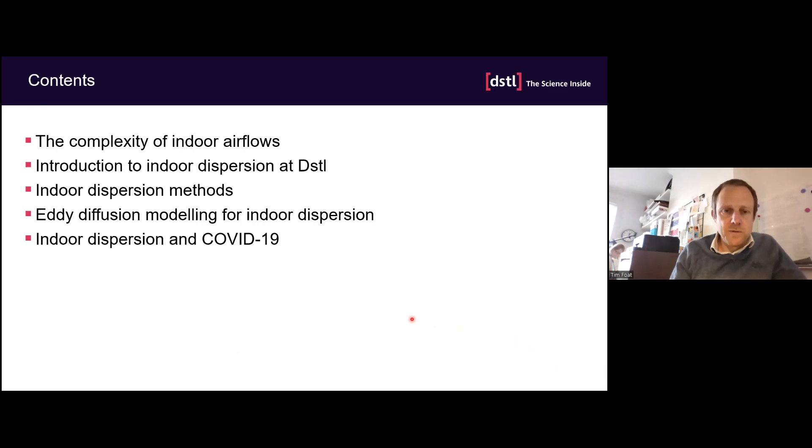So I was going to start by explaining why indoor airflow is complex. Indoor airflow is complex for a number of different reasons. And some of these are the flow in indoor space is often relatively weakly driven. So compared to outdoor flow, when you can have a strong dominant wind direction, often there's very weak drivers to the flow. And this could be the same in a mechanically ventilated space or a naturally ventilated space.

And then second, you can have multiple flow directions. So in a naturally ventilated space, you can have two windows open, a window and a door, and you have flow coming from different directions. And even in a mechanically ventilated space, you're likely to be supplying air from a number of different directions. And because of this weakly driven flow effect, the secondary drivers of the flow can be important, so the thermal effects can be significant. And all these factors together result in airflow that's nearly always unsteady and is typically turbulent.

So I've used this little example here to try and show some of the complexity in the airflow. This is a simple test case that was popularized by Nielsen in the 1990s, and we used it more recently to look at large eddy simulation. This room in our case was 9 meters long, 3 meters wide and 3 meters high. Air is supplied at the top left and is extracted at the bottom right. We had 10 air changes an hour, so the total volume of the room is refreshed 10 times every hour.

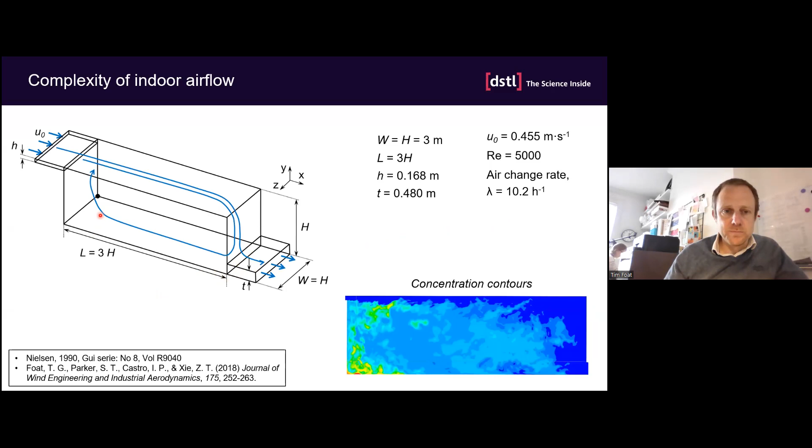And in our simulation, we released a tracer material on the bottom left part of the floor. So this animation shows results from our large eddy simulation CFD outputs, and it's showing normalized concentration. The concentration is normalized to the source concentration, and this was on a vertical plane through the center of the room. So fresh air comes in here, and you can see the tracer being emitted from the source on the floor here. And this points towards some of the complexity.

So even in this case, which is actually a more simple ventilation than you get in most indoor spaces, you can see the complexity of the airflow, the turbulent airflow coming in. And the picture's even more complicated when you get the airflow dispersing the tracer material that's on the floor.

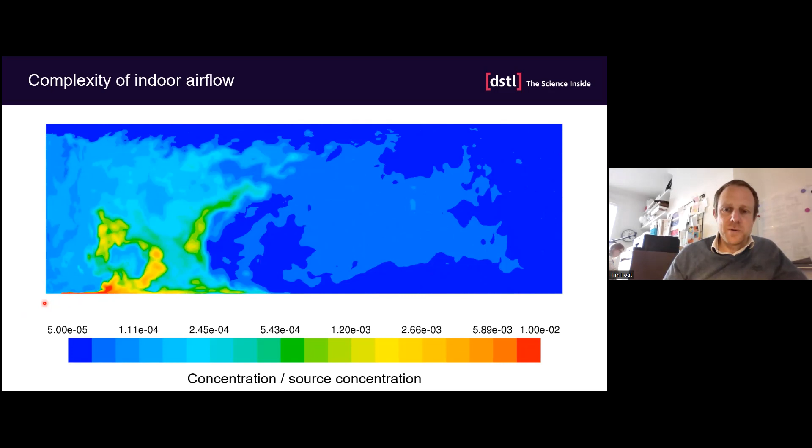So it's hard to both measure and predict the complex behaviour that we see in these types of spaces. But one question to consider is, do we actually need to worry about this complexity, or can we simplify the problem? And quite often the answer to that question is yes.

So looking at another example now to point towards complexity, this was an experiment we did some years ago where we had a reasonably complex room. It was about 25 meters long. We released a tracer gas where this cross is shown here. This was released for 20 seconds.

You can see the ventilation. There's vents running along the two sides of the ceiling. These are supply vents, and air is extracted from the back of the room. It's a reasonably low ventilation rate in this room, so it was about 4 air changes an hour. So the total volume of air is exchanged once every 15 minutes.

And what I'm showing here is the concentration measured at these 26 different gas sensors and how this changes with time. So you can see the first part of the experiment, so after 10 minutes, you end up with this very complex behavior. So regions of high concentration, low concentration, rapid changes.

But then as you move to the later period, actually, even though this room is complex and the airflow is complex, it tends towards a mixed state. So after 15 or so minutes, so around about 1 air change in this case, you end up with reasonably uniform concentrations across the space.

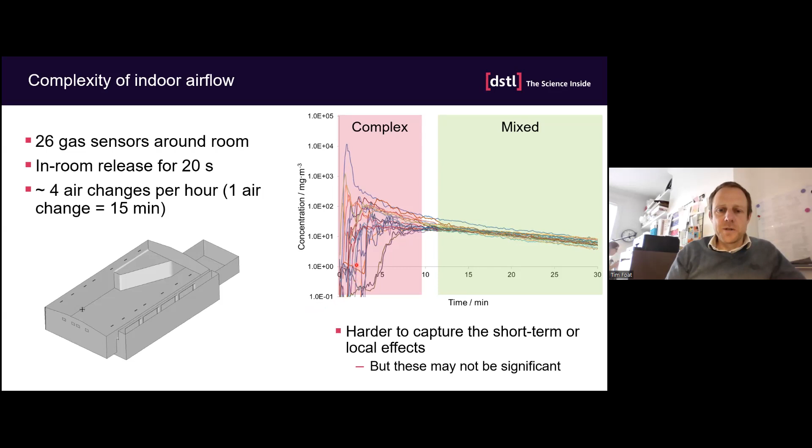So this early period is complex. So you can consider the airflow is complex either at early times or close to the source. So even at the mixed stage, if you had a continuous source, you can still end up with complex behavior close to the source. So it's harder to capture these short-term local effects, but it may be that these aren't significant depending on what the problem is you're trying to tackle.

So now looking a bit at indoor dispersion at Dstl. So we're primarily interested in the hazard from chemical and biological agents. And we're interested in buildings because these can be targets for terrorists, and people are confined within the space, and there's a lot less dilution than there is in the outside environment. So we're often required to understand the impacts of hazardous airborne material on indoor environments, to assess the risk and to figure out how we could protect the occupants.

And the things we're typically interested in are short-term deliberate releases or accidental releases. The release could be in the indoor space, or it could be outdoors and be transferred to the indoor space. We're interested in gas and vapor materials and also the aerosol phase. And we typically look at the time-dependent concentration or the integrated dose. And as well as these chemical and biological agents, we're also interested in vapor transport for detection of explosives.

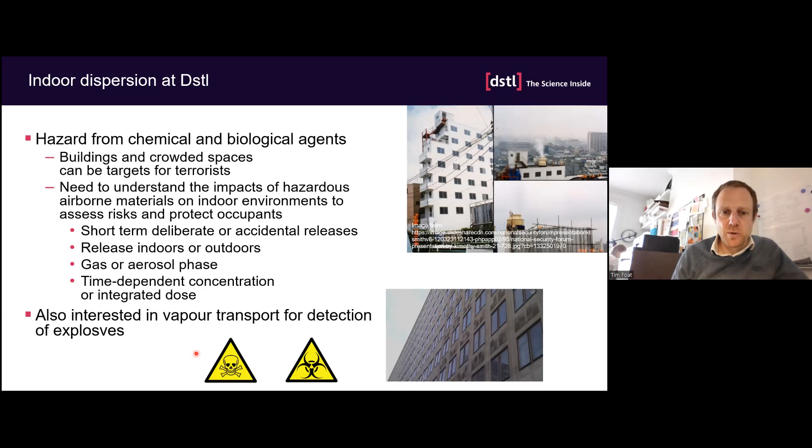So the environments we're interested in, we're interested in everything really from small-scale systems to complex networks. Our typical interest is non-residential buildings, and we're interested in everything from room scale to whole building scale. And these show some of the examples. So a large office complex perhaps, or a small meeting room or a public space.

We've also had an ongoing interest in transport, and this could be everything from a single vehicle to, recently, we've been interested in transmission of COVID on the London Underground, and this was a project called TRACK, which is Transport Risk Assessment for COVID Knowledge.

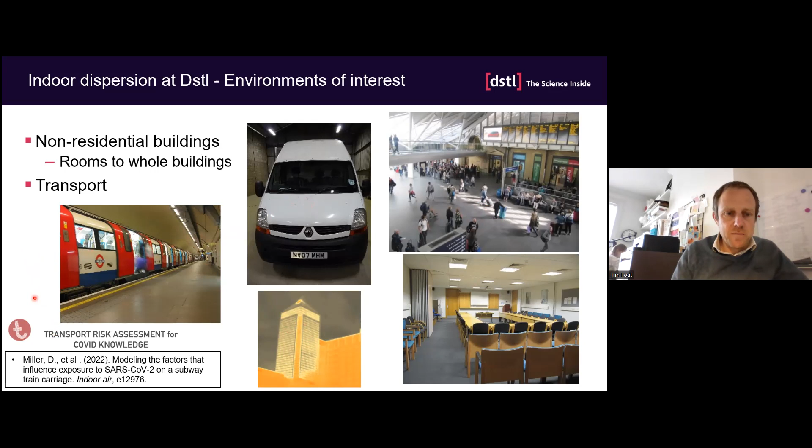So when you're thinking about indoor dispersion methods, you can split them broadly into 2 categories. So you can have specific approaches and general approaches. So the specific approaches are broadly, if you want to consider what's going on in a specific building or a specific scenario, these models are typically detailed, but they're very sensitive to change. If you change to a different scenario, a different building, you may get very different results. And it's sometimes difficult to base more general advice on this.

So the other end of the range is the more general type modelling. These models are normally coarser, but they're more robust, and these are more suitable for providing advice on. So the different indoor dispersion techniques support one or other of these approaches, or could match multiple of

them. So typically experiments or high resolution modelling, such as computational fluid dynamics modelling, are typically supporting this specific advice, whereas the single zone modelling and multi-zone modelling, which I'll talk about in a bit more detail shortly, typically support more of the general approach, and then other techniques span the two. So I'm going to move now through some of the different modelling methods and some experimental methods.

So the first one I'll introduce was well mixed modelling. So going back to the experiment we had before with the concentration time series. I said that even in this room, which is quite complex, after a short period of time, you end up with this mixed condition. So what we can do, we can apply what's called a well mixed model to this environment, which basically consists of an exponential rise in concentration followed by an exponential decay.

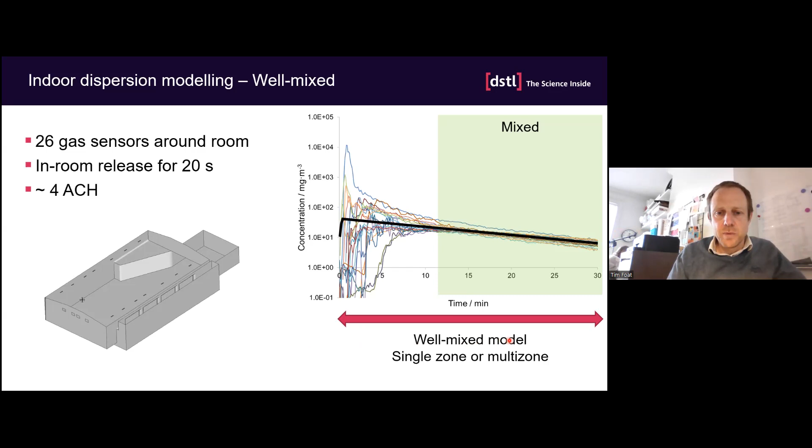This well mixed assumption can be used in a number of different techniques, and the two main ones we use are single zone modelling and multi-zone modelling. So single zone modelling, as I said, considers an average concentration in a room or even a building, a simplified building. And it's based on this simple representation.

So you just have a single volume, you have a flow rate of air into the space, fresh air, you've got a release rate into the space. And these are the key parameters that drive this type of simple model. You can take this to the next extent by including things like a ventilation system. So you could have contaminated air coming in from outside. You could perhaps have some filtration efficiency in the ventilation system, or you could have a recirculating ventilation system.

And you could have other things like loss terms, you could have aerosol depositing to surfaces, or vapour sorbing to surfaces. And we've been using these types of models for some time at Dstl, and they're very useful for carrying out rapid calculations and providing more general generic advice.

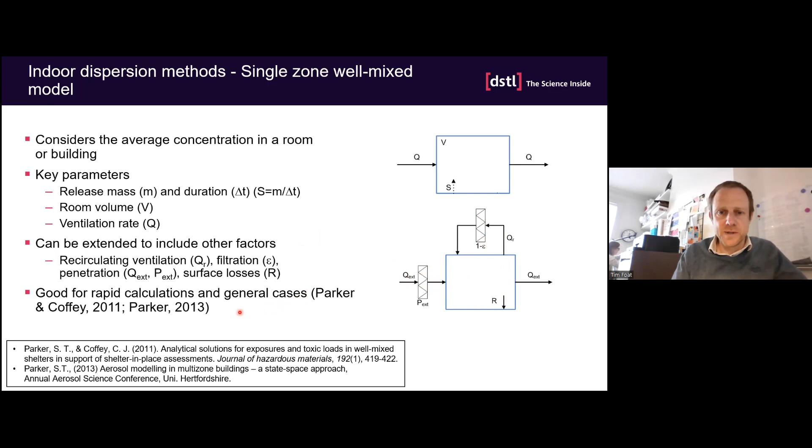Then the next level of complexity, using this well mixed type of modelling, is multi-zone modelling. So for this, you can start looking at a whole floor of a building, or even a whole building. So here you have a number of separate well mixed spaces, and you have to define the connectivity between the different spaces. So here we've got a single storey of a building, so we've got lift shafts, we've got the main office space, we've got stairwells, and each one of these is a separate well mixed zone.

As I say, you define the coupling between the two. You could represent a single storey of a building, or you could put these together and you can end up with a representation of the whole building. With this modelling technique, multi-zone modelling, you can calculate the airflow and the dispersion. There's a number of third-party tools available, and the one we use primarily is CONTAM, which I believe was developed by NIST in the US.

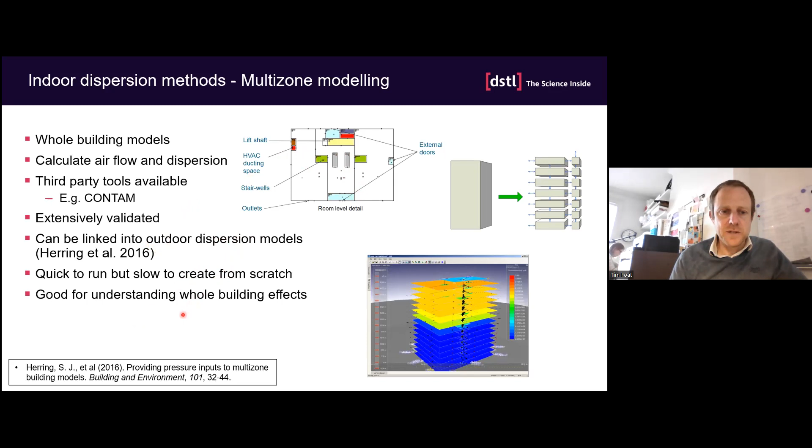Extensive validation has been carried out for these techniques over the years. And something we've looked at is linking this type of indoor model to an outdoor dispersion model. So these models are very quick to run, but even though they're simple, they're reasonably complex to set up, as you can imagine, because you've got to define lots of spaces and the interconnectivity, but they're very good for understanding whole building effects. So the next level to take the well mixed modelling to is something that's called state space modelling.

So state space modeling is a method where you solve a system of coupled first order differential equations, and you can understand the dynamics of a more complex system. So the way we use it, we take the steady flow field from the multi-zone model, and then use a state space method to predict the dispersion of the material. And the approach we've used most often is producing these things called impact matrices.

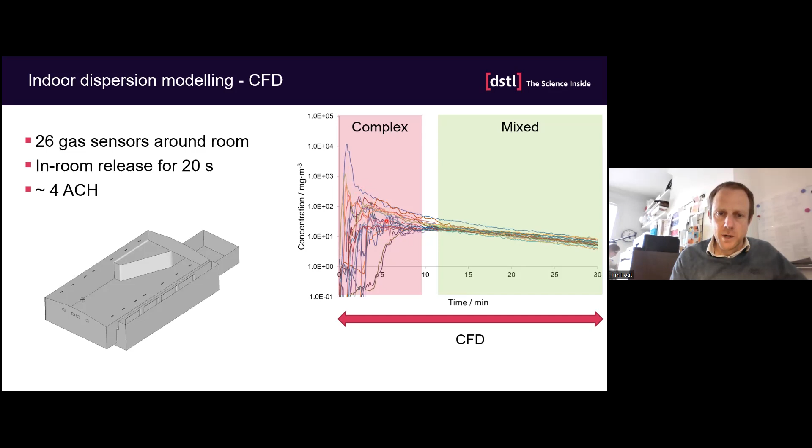So the next modeling technique I'm going to talk about is computational fluid dynamics. So in theory, CFD can predict what happens in the mixed phase, but also in the complex phase. But even these high resolution techniques would struggle to predict the full detail of these concentration time histories. So computational fluid dynamics works by solving the fundamental equations for fluid flow over many computational cells. And the biggest problem with CFD is it's very slow to set the models up and slow to run the models.

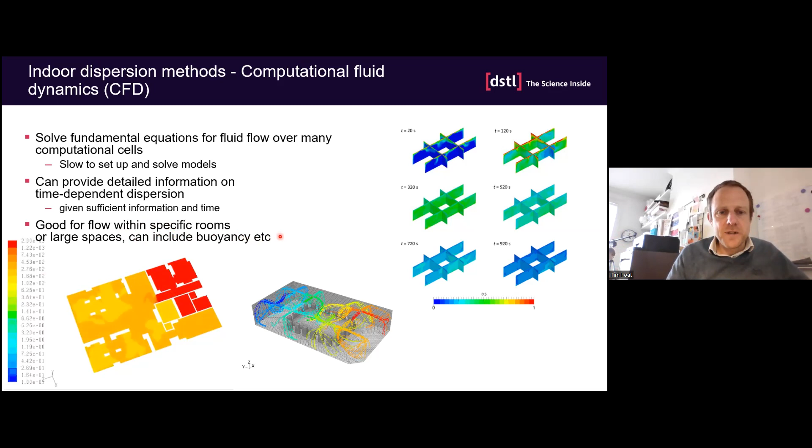But they can provide very detailed information on time-dependent dispersion, assuming you have sufficient time to build the models and analyze them. And they're very good for looking at flow within specific rooms and large spaces. So the well-mixed assumption, that the material mixes instantaneously across the space, holds when rooms are smaller or they're very well ventilated. So when you get to the large spaces, that well-mixed assumption falls down, and that's when the CFD models are most useful. And then within CFD, you can also include more complex physics. So you can include buoyancy, for example.

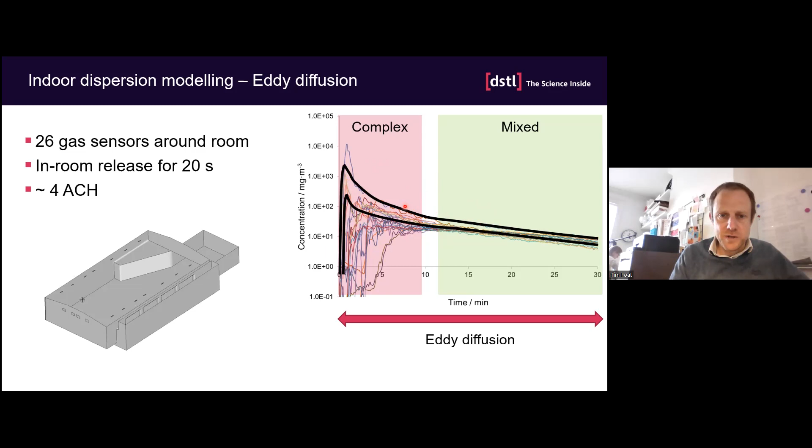So the next modeling technique I want to talk about is eddy diffusion. So eddy diffusion is something that sits between the well-mixed modeling and the CFD technique. So it's based around simple analytical models that can be solved very quickly, but it predicts the spatial variation, the temporal variation in concentration. So if we look at our concentration time series here, an eddy diffusion model would capture the rising concentration, the decay, like the well-mixed model, but also captures some of this spatial variation.

So a bit more about eddy diffusion modeling. So it's often impossible to build and run a full CFD model, and this may be because you haven't got the time available, or you don't have the detailed information about the geometry or the flow in the room. And so this eddy diffusion approach provides us with a simplified representation of spatial resolution.

And this is an output from a simple eddy diffusion model. So we've got the dimensions of the room here. So this is a plan view looking down. And we've got the width and the length of the room, and this shows the concentration. And this is the kind of prediction you get from an eddy diffusion model.

The technique works on the assumption that there's isotropic mixing on a large scale, and this mixing can be due to laminar and/or turbulent motions. And the eddy diffusion models in their simplest form can just be solved in Excel, for example. And this is a simple example which was produced by Crank in 1979. And this is an instantaneous release of a mass of material M in an unbounded space. And so this can be solved very quickly.

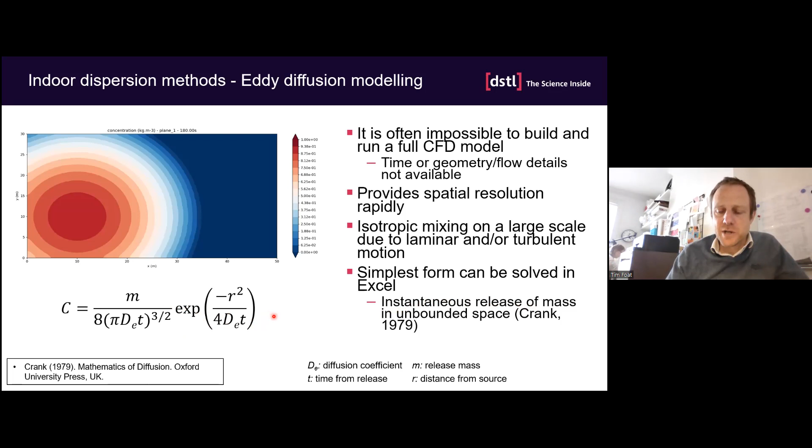So the turbulent diffusion coefficient, or the diffusion coefficient that represents this turbulent or laminar mixing, typically ranges from 10^-3 m²/s to 0.1 m²/s. So if you compare this to molecular diffusion, which is typically 10^-5 or 10^-6, this turbulent laminar mixing is much larger than the molecular mixing.

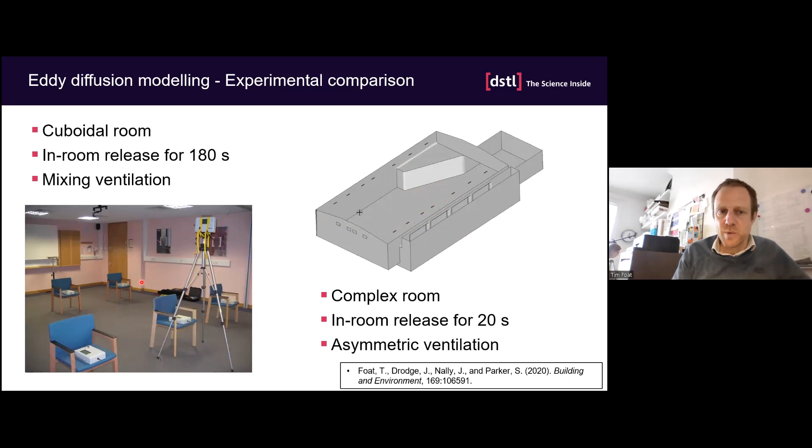So this is a cuboidal meeting room, with a volume of about 250 cubic meters. There was a release of tracer gas in the corner of the room for 180 seconds. This room has mixing ventilation and is pretty well mixed. It's got an air change rate of about 10 air changes an hour, I think. So these are the results. The top row is the simple meeting room. The bottom row is this more complex assembly hall.

So we're showing the concentration time series again. And for each of these, we've got three lines for the experiment and three lines for the model. The three lines show the maximum, the minimum and the average concentration at each time point from all our monitor locations. The coloured lines are from the eddy diffusion model, and the black and grey lines are from the experiment.

So you can see here in this simple meeting room, the eddy diffusion model is pretty well predicted. It nicely predicts the rise of the lowest concentrations. It's got the decay phase very well predicted, but it's under predicting some of the peak concentrations. And even in this more complex space, we're getting the decay pretty nicely. It's predicting the rise of the minimum concentrations, but it's under predicting those, and it's also under predicting some of the peak concentrations.

So all in all, if you can get the right diffusion coefficient, the eddy diffusion model can be very, very useful. But I thought I would also show, if you try to model these same scenarios with the well mixed model, it can do pretty well. Particularly in this simple meeting room, which is pretty well mixed, the well mixed model gets the decay phase very well. Everything after 250, 300 seconds, it's predicting very well. But it is over predicting the lowest concentrations and under predicting the highest.

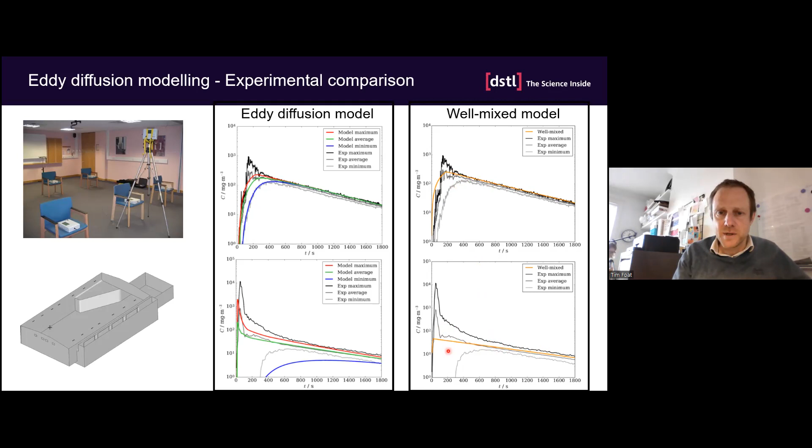And in the complex space, again, it's doing pretty well in the later phase, but it is under and over predicting in the early phase. So these eddy diffusion models are completely dependent on the diffusion coefficient. It's this diffusion coefficient DE here which drives the rate at which material is mixed across the space.

And historically there's been very limited experimental data for buildings. So some people have tried to produce relationships to define this. So Cheng et al. in 2011 produced an empirical relationship based on some naturally ventilated spaces. And he showed that the diffusion coefficient was a function of the air change rate of the room and the

volume. And Drivas and Karlsson in the 90s produced turbulent kinetic energy balance models. So they look at the rate at which turbulent kinetic energy is being produced and dissipated, and they come up with quite a nice relationship. And we took this a step further in 2020, and we used a set of CFD models. So what is shown here, each one of these crosses was a CFD model, which we kind of automated the CFD setup. So we ran 250 different CFD models of rooms, different shape sizes.

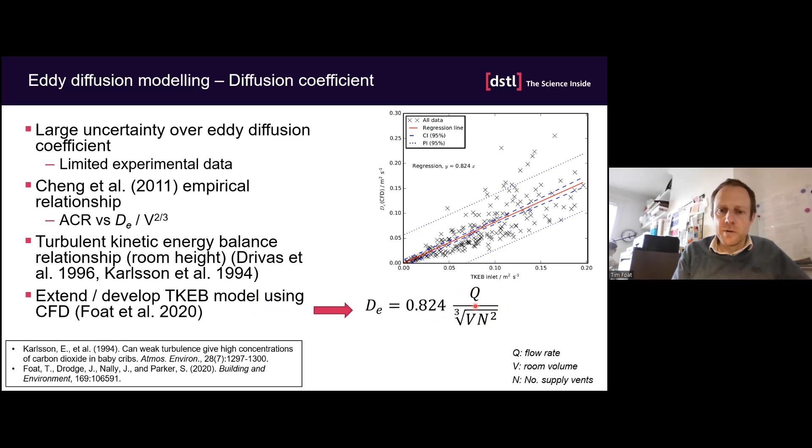And we showed that by using this TKEB model, but setting the characteristic length scale to the size of the inlet vent, as opposed to the room height, which is what Drivas and Karlsson had done, we showed that you could simplify the relationship. So then the diffusion coefficient is just a function of the fresh air flow rate in the room, the total flow rate in the room, the volume of the room, and the number of air vents.

So we're also supporting a couple of studies looking at trying to further improve our understanding of how the turbulent diffusion coefficient varies in realistic spaces. So the first one is there's some work being carried out at Southampton University by Dr. Desmond Lim and Dr. Christina Vanderwel. And their primary interest is the effect that people movement has on the mixing. So they're using the PLIF technique, planar laser-induced fluorescence, and the PIV technique, particle image velocimetry.

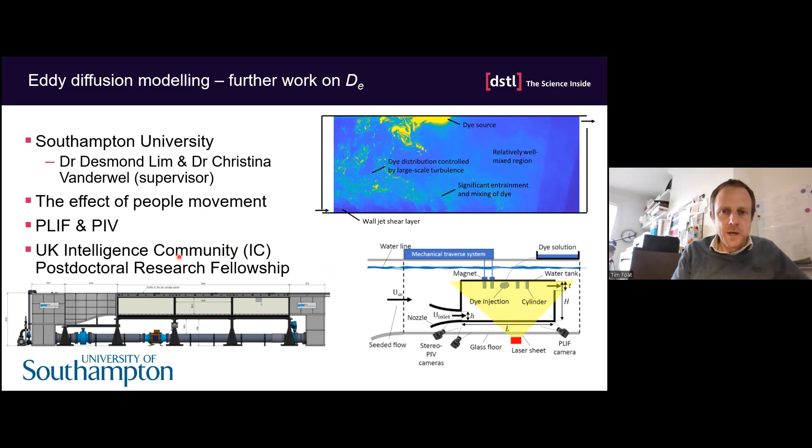They've produced a model that represents a simple space, and this is the same kind of space as shown earlier from the Nielsen 1990 test case. And they've put their model where they can move these cylinders around, which will represent the people movement. They've put this model in a water tunnel at Southampton, and they're going to try and study how the diffusion coefficient changes in this space. This work's funded by the UK Intelligence Community Postdoctoral Research Fellowship.

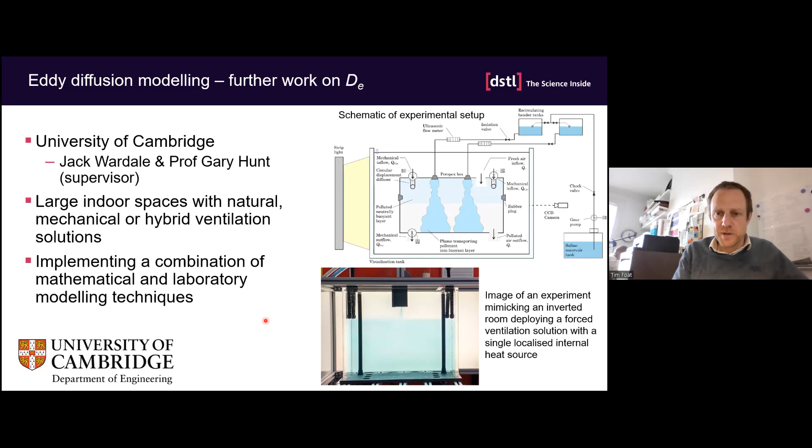And the second study is at University of Cambridge, and this is being carried out by PhD student Jack Wardale and supervised by Professor Gary Hunt. So Jack's primary interest is the large indoor spaces that are either naturally ventilated, mechanically ventilated, or of a hybrid ventilation. And they've got a static water tank set up, and they've got a combination of mathematical techniques and laboratory techniques to understand how this diffusion coefficient changes.

We've also produced an open source Python tool for eddy diffusion modeling. So this was done with a company called Riskaware, and the tool's called the Rapid Indoor Dispersion Tool, RIDT. It's available at this link here. It's a simple text-based tool where you just define the size, shape of the room, the diffusion coefficient, where you want the releases to happen, the release type. They could be instantaneous or continuous releases. You can run it in just a single mode or an automated batch mode and get some graphical or text output. And this is just an example of the graphical output.

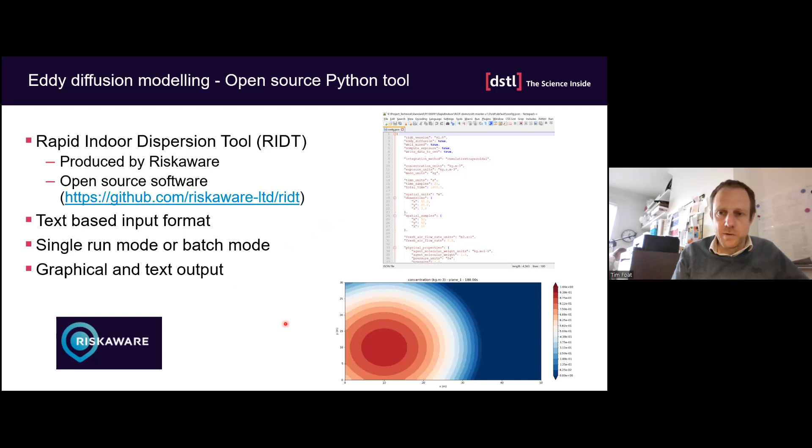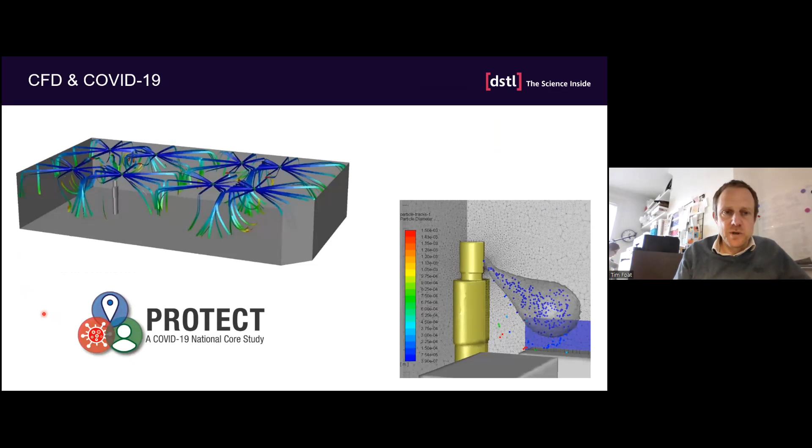So for the rest of the talk, I'm going to talk about this project where we've been using CFD indoor dispersion to look at the transmission of COVID. So this was a work package within the NCS Protect project. So the NCS Protect project is a partnership between 21 UK academic and research institutes. And the aim of the work was to understand and improve how SARS-CoV-2 is transmitted from person to person and how this varies in different settings and environments.

The aim of our specific work package was to understand and characterise respiratory droplet dispersal in these indoor spaces. And this work we carried out in partnership with the Health and Safety Executive and also the University of Leeds. There's also some colleagues at Dstl who have been supporting the NCS Protect project in other areas. So some colleagues have been using the QMRA technique, which is quantitative microbial risk assessment modelling. And this was done to assess potential factors that influence disease transmission in indoor spaces. And then other colleagues have been looking at touch transfer, so how efficiently COVID is transmitted to and from surfaces.

So for our work, we were particularly interested in how temperature and humidity affects this airborne exposure. So the test scenario we used was the one I've talked about earlier, this simple meeting room that has mixing ventilation, air is supplied and extracted from the ceiling. In our model we had an air change rate of 5 per hour. There was no recirculation within the ventilation system. And we ran the model at 3 temperatures, so 16 to 28 degrees centigrade, and three relative humidities, 30 to 70%. The person was coughing in the room, and each condition was averaged over 5 coughs, and each cough was followed by a 5-minute mixing period. There were no face coverings worn by the person.

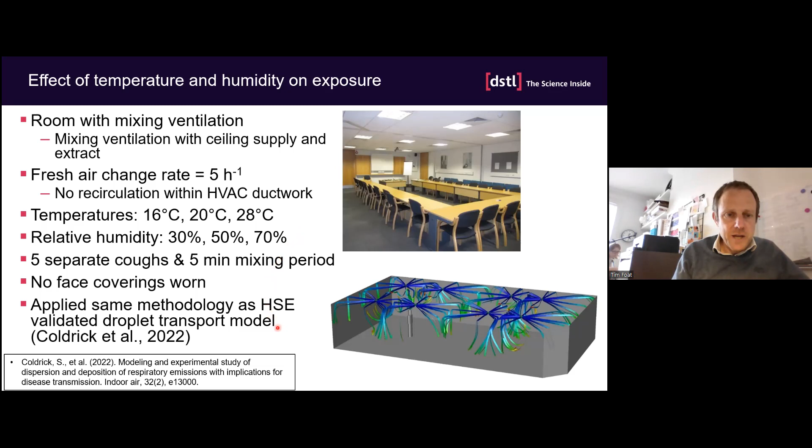And we applied the same methodology that had been previously developed by HSE and is reported in this paper by Coldrick et al. And in this previous paper by Coldrick et al, their methodology was validated using this experimental data from Public Health England, now called the Health Security Agency. So in our model, the person coughs into the space, so that the cough exhalation introduces a number of droplets into the room.

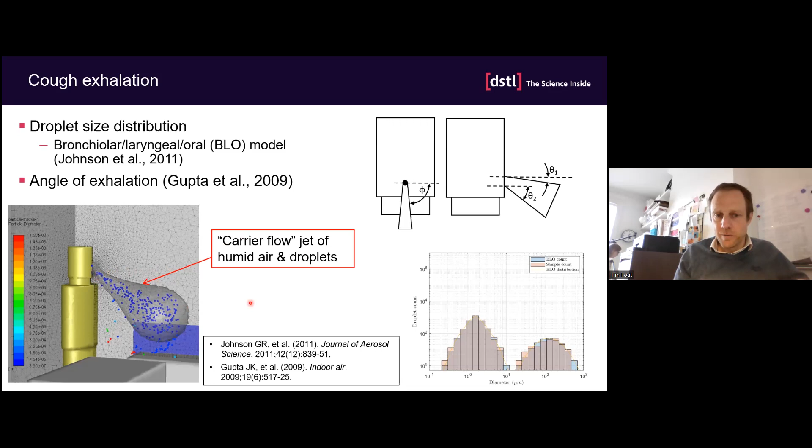There's a number of different ways to define the cough droplet distribution, but we chose this model by Johnson et al, which is called the BLO model, the bronchiolar laryngeal oral model, and it's shown here in simplified form. So this is droplet diameter in microns against the number count. So these 3 modes end up producing what they show to be a 2-modal distribution. And then the angle at which the person coughs into the room and the velocity of the cough was based on some work by Gupta et al from 2009. So this person coughs into the room, and their exhalation contains this carrier flow, the cough carrier flow jet contains humid air and droplets.

Within our model, we modelled the thermal effects from the body, heat from the body and the exhaled air. The turbulence was represented using the K-Omega SST model, which is a standard model used for indoor airflows. The heat from the body, we had 25 watts per square metre heat from the body. We only represented the convective heat flux and not the radiative flux. To model the droplet transport, we used the Lagrangian particle tracking model. This was a fully coupled model, so the carrier flow imparts momentum to the particles or droplets and vice versa.

Our droplets evaporate with time. The droplets were just represented as water droplets, but with a non-volatile core. So the idea is the water droplets can evaporate till they get down to this solid core. And we did previously run some of our models with a more complex droplet, where the vapor pressure of the droplet was based on the concentrations of the salts, etc., within the droplets. But we chose to simplify the representation of the droplets here to enable us to run the models more quickly and allow us to model more scenarios.

Then we looked at the number of droplets, and the number of viral RNA copies within each droplet were based on the viral load in the respiratory fluid and the Poisson distribution. So this little animation just shows an example. The person coughing, the cough lasts 0.4 seconds. This shows the droplets are coloured by diameter.

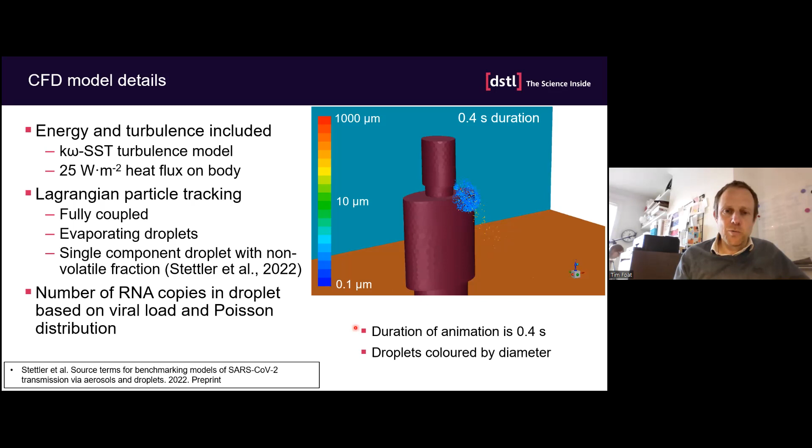So you can maybe just about see the larger droplets are fired out at the front of the cough jet, but quickly settle out, whereas the smaller droplets are more rapidly slowed by the static air in the room.

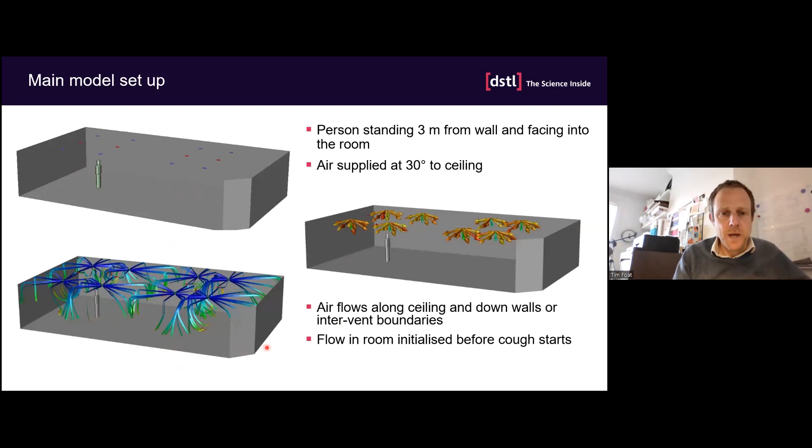So within the model, the person was standing 3 meters from one end of the room, and they were coughing down the long axis of the room. The airflow was supplied from the vents in the ceiling, louvered vents, and these louvered vents supply air at 30 degrees to the ceiling. And this forces the air to travel along the ceiling and down the walls, or the two jets meet at the intervent boundaries. And the flow is initialized in the room before the coughing starts.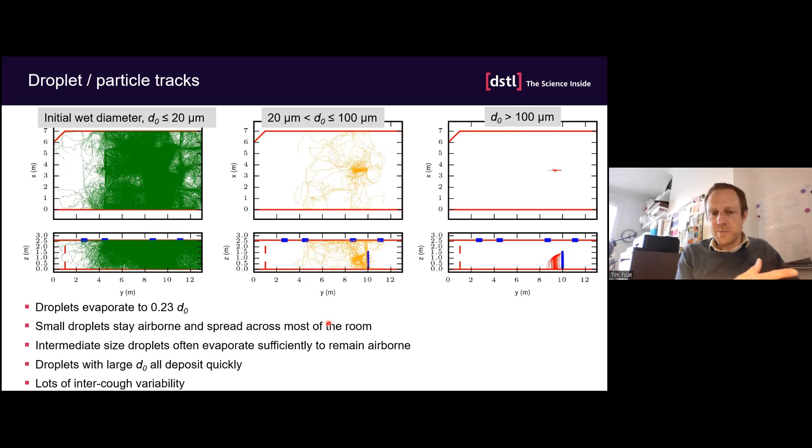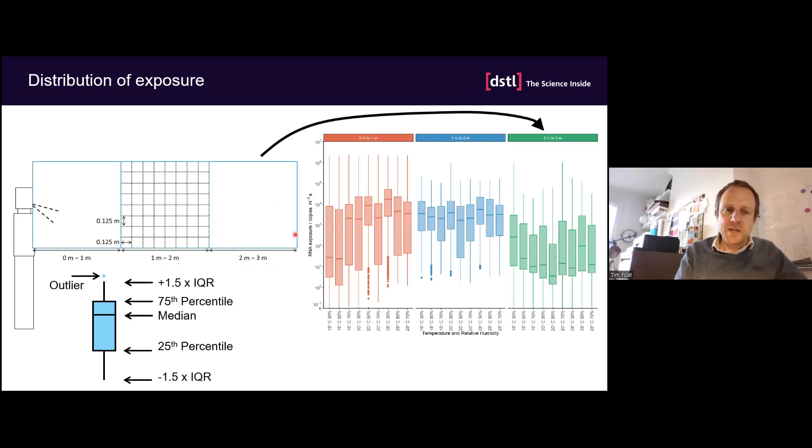The droplets are exhaled here, and by the time they've moved out of the first volume, lots of the droplets have evaporated and they're becoming more affected by the room airflow. So they're becoming more uniformly mixed in this space. This is why we're getting tighter distributions. And then by the third volume, nearly all the larger droplets and the larger intermediate sizes have fallen out. So the air is being diluted as well. So we're ending up with lower exposures in this third volume.

So then what we've done is broken down the exposure into the distance from the person, the temperature and the humidity. So first, the distance from the person. We've got the three regions again, the first volume up to 1 meter, the second up to 2 meters, and the third up to 3 meters. And you can see here that there's no statistically significant decrease in the median as you move from the first volume to the second volume. So it's showing 1 meter social distancing would have very little effect in this case.

But as you move to the third volume, there is a significant decrease in the median exposure, and the whole distribution is shifted down. In fact, we're getting a factor of 200 reduction in exposure. And I should say that these exposures are based on 2 people talking face to face. If you had other people in the meeting room, or people off to the side of each other, you'd end up with a more complex picture. Then we've looked at the effect of humidity.

So what we're showing here is we've got the 3 humidities. So we've got 3 volumes again, the 3 different humidities, 30 to 70%. And what we showed here is we get a statistically significant decrease in the exposure as the relative humidity is increased. But this effect is very small in kind of absolute or relative terms. So you can see there's very little actual decrease in this exposure. But the overall effect is what's been reported before.

So for a number of years, starting with Wells in 1934, people have produced simple analytical models, typically of a single droplet, and they showed that they were seeing these effects in these simple droplet models. And people have done CFD as well, where they've represented a number of these processes, and we're showing a similar thing. But what we've tried to do in our modelling is do a more realistic representation of all the complexity in the airflow.

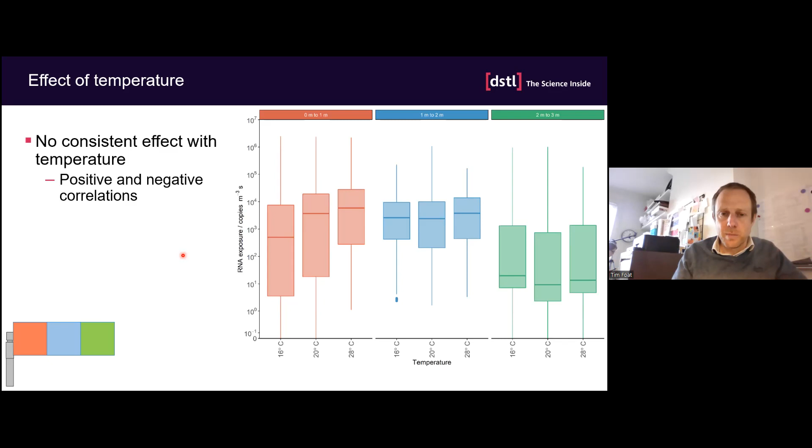And then finally, looking at temperatures. So interestingly here, we were getting a mixed effect with temperature. So in this first volume, as you increase the temperature, you're getting an increase in exposure. But if you look at this third volume, an increase in temperature here resulted in a decrease in exposure. So we were getting these positive and negative correlations. So this was a result we weren't expecting, but it shows that any effect that temperature is having on the droplets is being overridden by the complex turbulence and air movement in the space.

So to conclude this NCS CFD study, our results have shown the importance of the standard government guidance, which is the importance of wearing face coverings, to reduce the amount of droplets that are exhaled and reduce the amount that are inhaled, and maintaining social distancing. Both these should help to reduce the inhaled dose. And then the conclusions of our work,

so I'll just go back to show, yes, the point I wanted to make here is that if we increase the relative humidity, the droplets evaporate less and they fall out of the air. So this reduces the airborne exposure. But the opposite effect of this is if we're reducing the airborne exposure, we're increasing the deposited material. So if someone was sitting or standing by a desk in your space, by reducing the airborne exposure, we're promoting the deposition. So you end up with more deposition on the surface. So this could have a negative effect, that it could increase fomite transmission.

And people have also carried out some studies to look at the effect of relative humidity on fomite transmission. And my understanding is that relative humidity can increase the efficiency with which material is removed from a surface. So what we're doing here is very much only looking at the fluid dynamics effect of the transmission. So the other effects we haven't considered, so it's possible that temperature and humidity could affect the physiology of both the infected person and the susceptible person. So as I say, this is very much a fluid dynamics effect only.

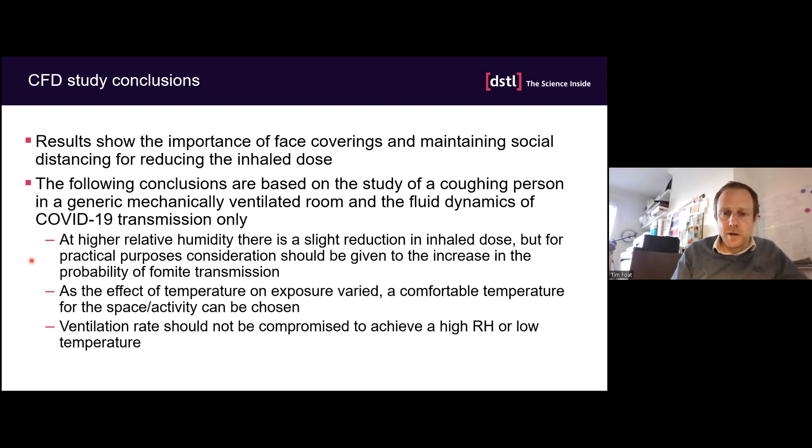And then conclusions from indoor dispersion of interest to Dstl. So indoor dispersion problems for security applications are typically focused on short duration events and often with limited information available. We like to use a wide range of approaches, and this is required in order for us to be able to provide robust advice. And over the years, we've tended to move perhaps from the more specific advice to the more general advice.

And this general advice is really useful because it can provide insights into the more general dynamics of the system. And then some of the ongoing challenges we feel is speed versus resolution. So we can have the fast running models, so well mixed models or eddy diffusion models, but we're not getting the resolution that's in the CFD. There's a challenge: do we want to provide generic advice and perhaps miss out some important details, or the specific advice? Validation for large indoor spaces is difficult.

And ideally we'd be able to monitor the airflow and the dispersion, and this would be tracer dispersion, tracer gas and aerosol dispersion. There's particular challenges around naturally ventilated spaces where you can have quite weak drivers of the flow, and the flow can become stratified, and even CFD can struggle to predict these types of flows.

We'd like to be able to include more complex effects, so the movement of people around these spaces and how they affect the airflow. And also we're interested in coupling models, so coupling to the QMRA models, perhaps as we use in the track work, or also looking at how people respond, how do people evacuate in a space once they detect an event.